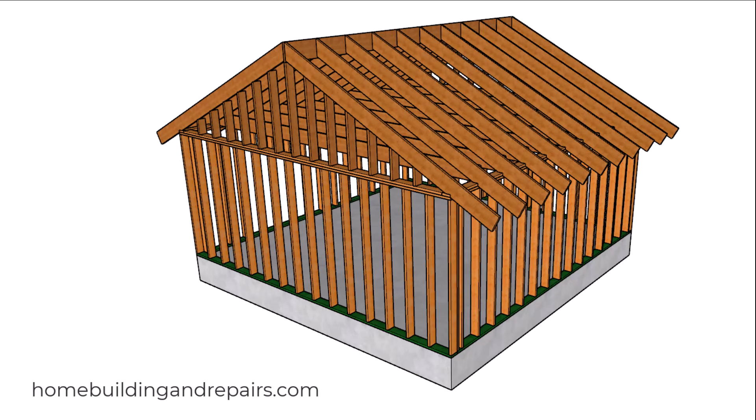In this video, I will provide you with what the International Residential Code says for attaching roof rafters to the ridge and framing plates. And this will be for a setup like this, where we have either rafter ties or ceiling joists, and even some collar ties.

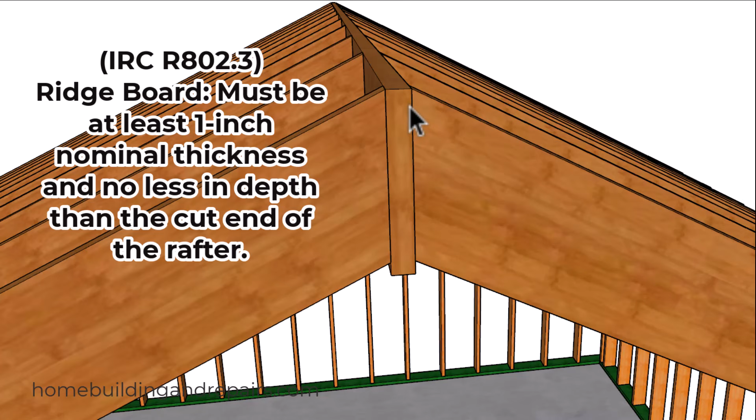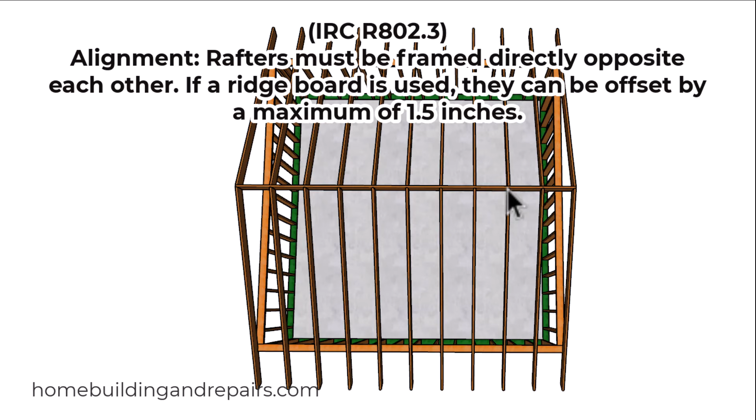Now, the first thing the code says is that the width of the ridge board needs to be at least 1 inch. And the length of that board needs to be at least as long as the edge of this rafter cut right here. So most of the time you are going to use a 1.5 inch thick board, and the code would like to see these rafters line up, but also allows you to have a 1.5 inch offset.

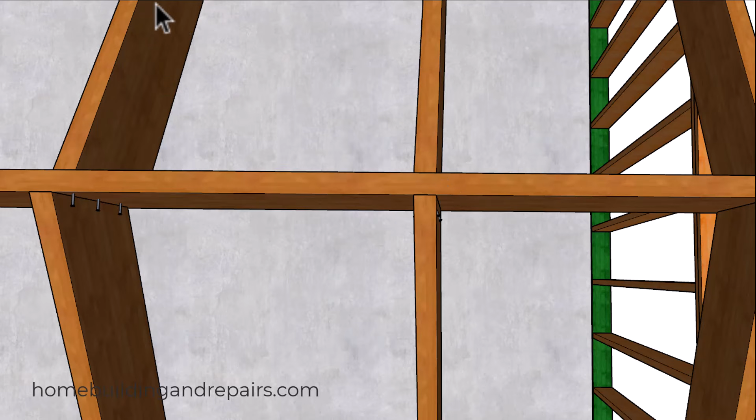Now, when I first started, I thought the building code said this board needed to be at least 1.5 inches to offset this 1.5 inches, but that's not what it says. So it would like to see them line up, but will actually accept something like this. And you're going to run into a situation like this when you're dealing with ceiling joists that might be lapping over a wall, or even rafter ties in some cases.

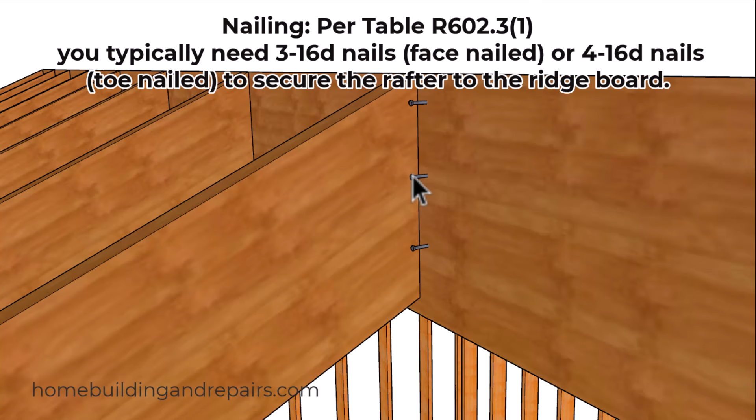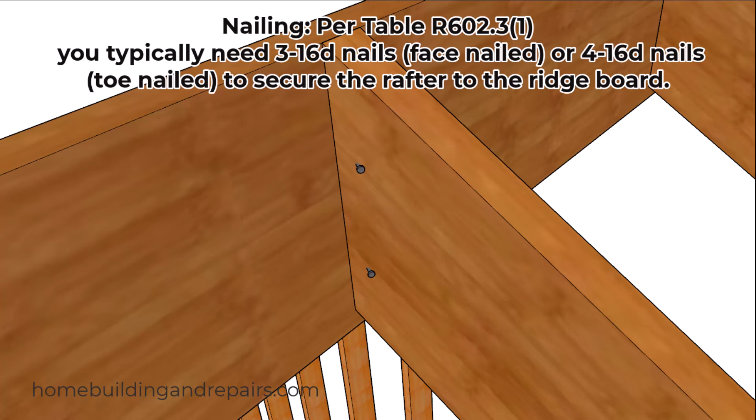And as far as the nailing goes, you can use 3 16D nails if you're going to face nail through the ridge board and into the roof rafter. Or you can use 4 16D nails. And if I was going to use 4 nails, I would put 2 on one side and 2 on the other side. Even though it does not say you need to do this, you just need to use 4 nails.

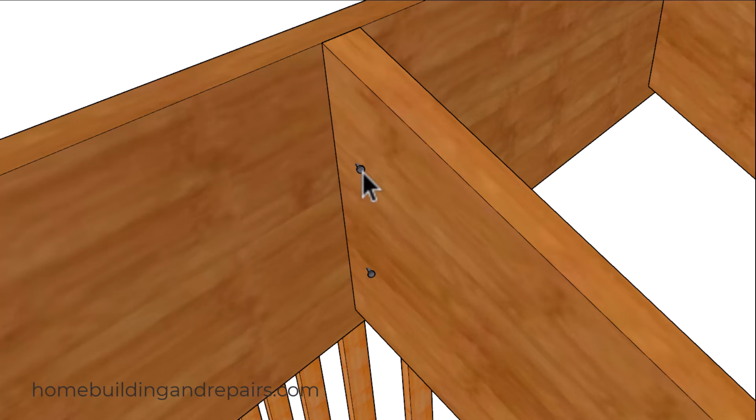And something else I would like to point out is I try to avoid lining these nails up with the nails on the other side to prevent the lumber from splitting. And I would like to see at least a 1 inch difference if possible. And keep in mind that might not be possible if you're using a 2x4 roof rafter. And I don't think I would use 4 nails for a 2x4 roof rafter anyway.

And as far as the bottom goes, they are requiring you to have at least 2 16D nails and a minimum length for the seat cut of 1.5 inches. And I would also like to add that I like to make my seat cuts a little bit longer so that I can space these nails apart a little bit, again, to prevent splitting. And I also like to have 2 nails on one side and 1 nail on the other side.

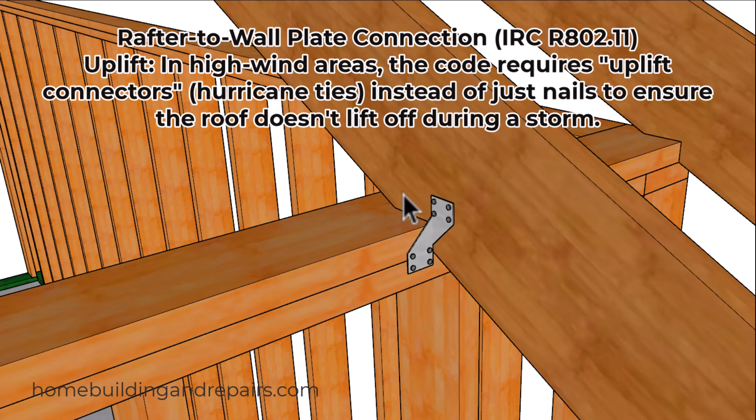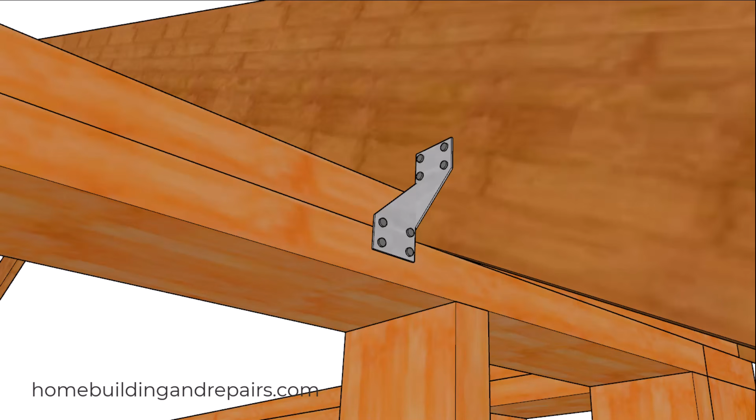And another thing the building code suggests is that you use some type of framing hardware, like a hurricane tie, if you are going to be working on a project in high wind areas. Now, exactly what that wind speed would need to be, I would not be able to provide you with that information. And again, I do realize other YouTube channels do not mention this most of the time, and some of you get tired of hearing it. But the truth is, you're going to need to check with your local building departments to make sure that this is actually applicable in your area.